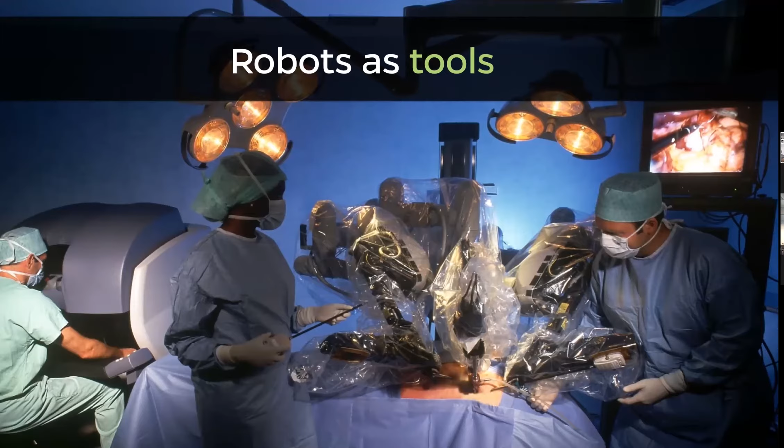On the other extreme of this spectrum is the autonomous robot, where robot is an autonomous tool. They operate and function autonomously without human intervention pretty much. A good example of this will be warehouses. Any big online shopping store, they operate this way nowadays.

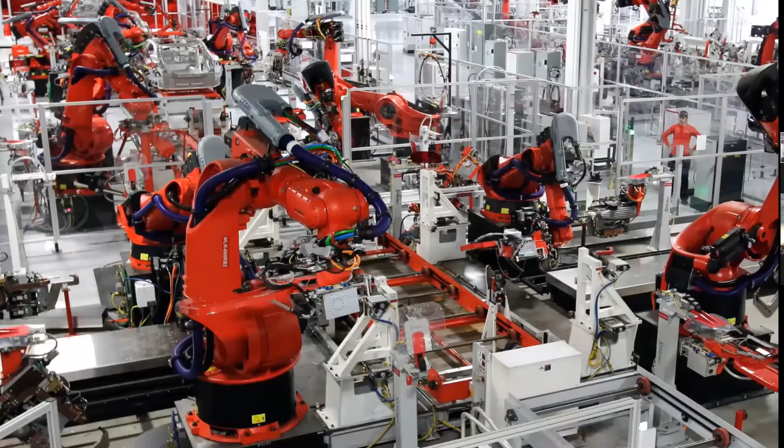Another example of this is manufacturing, like car manufacturing. I would say nowadays cars are manufactured pretty much 80 to 90% fully autonomous through the process. If you look at this, there is no interaction at all. There's only one person that sits outside of the cage, and that person doesn't do anything, just monitors to make sure things are going. So this is on the other extreme of robots as autonomous tools.

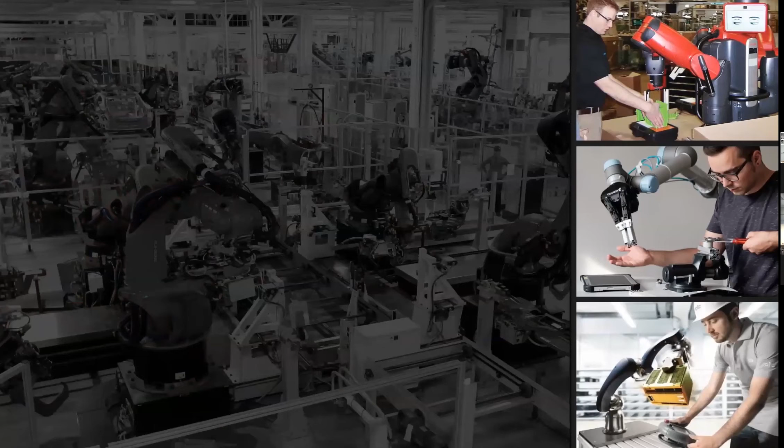But now we're transitioning to something in between, where we have human-robot collaborations, where people and robots are working closely as a team, as partners. We're seeing this in manufacturing, and there are a number of reasons behind this. One is that people's shopping style is different, and they want customized items. We just want to buy things more quickly nowadays. So there's a lot of customization, and short product cycles drive a lot of this.

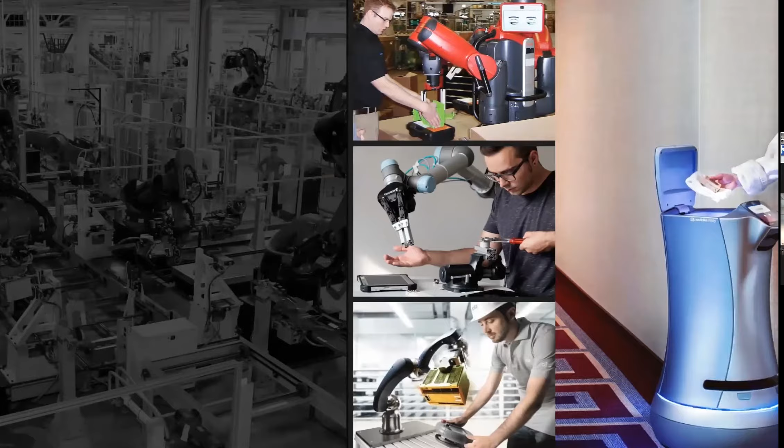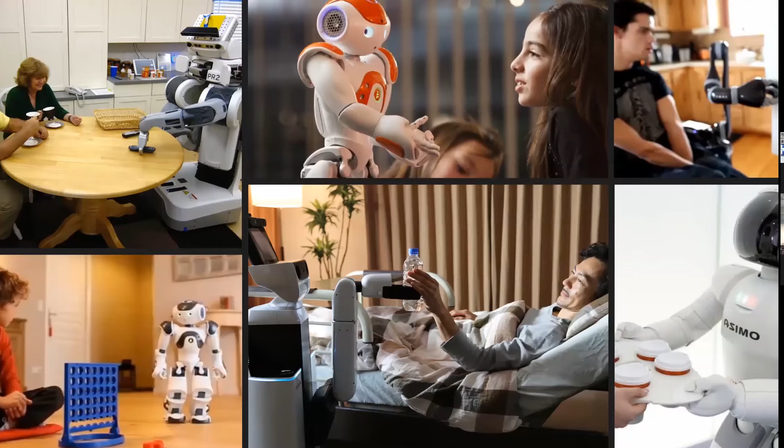Also, small and medium-sized manufacturing cannot afford fully autonomous floors of robots. We're seeing this kind of transition not only in manufacturing, but also in a lot of our daily environments. In hotels, big supermarkets, they are also piloting robots to do some of the non-human-facing kind of work. We're also seeing this in more close-to-us environments, like home, learning, hospital, where we see a lot more close interaction between humans and robots.

So there's a group of people, myself included, doing a lot of work in this space, trying to facilitate this fluid, effective interaction between humans and robots. And in this itself, I see a lot of opportunities where we can bring this kind of technology to benefit humans at large. So today I just want to talk about a few projects that highlight our learning in the past few years.

I structured this as a way of principles of effective human-robot interactions. We learned a few good principles that all designers and developers should pay attention to in the coming years as we continue to develop robotic systems for people.

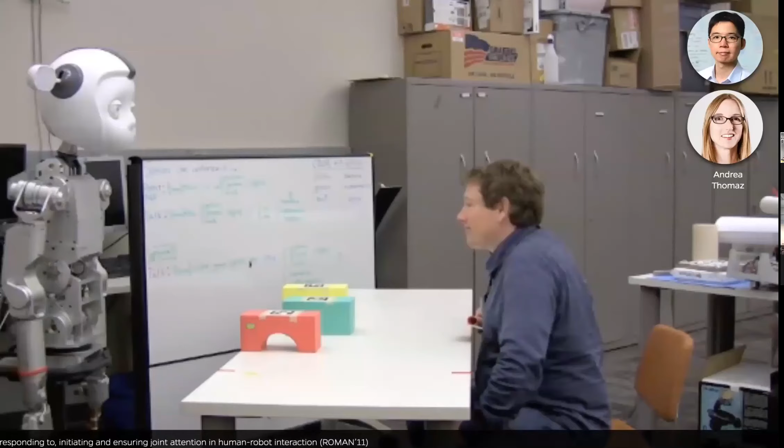So the first principle I want to talk about is multimodal social behaviors. I'll start with this video, which is about 10 years ago when I started at Georgia Tech. The interaction here is very simple - just to give you some context before I play it. The person is going to teach the robot some concepts: this is a yellow object, this is a green object, this is a red object. The yellow object is a banana, the green object is a watermelon, the red object is an apple, using gestures.

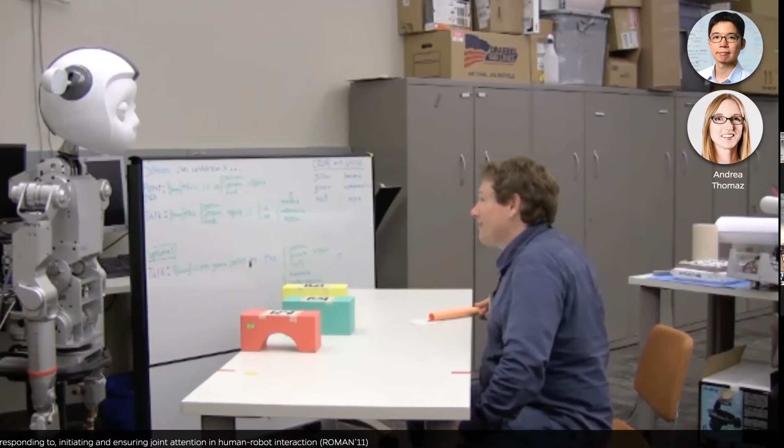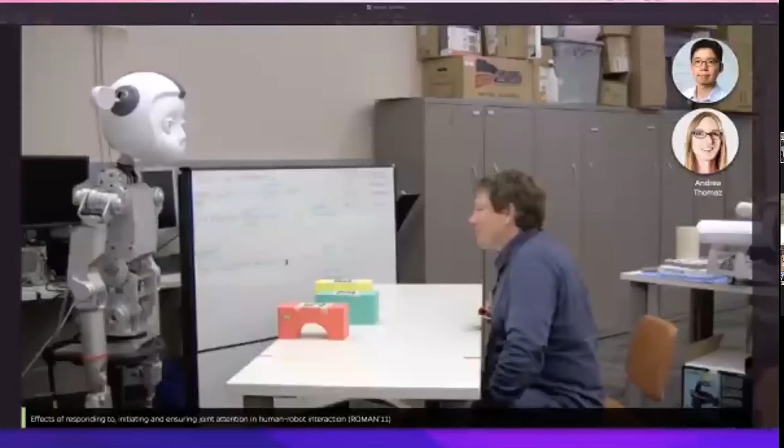Should there be audio? Okay, doesn't sound like we have audio. So let me share again - share audio when you share your screen. Well, let's see, I may need to stop sharing. Does that work? No, we don't hear anything.

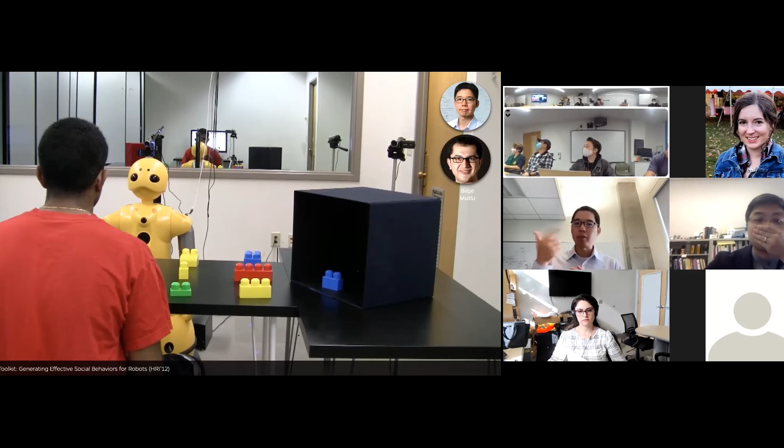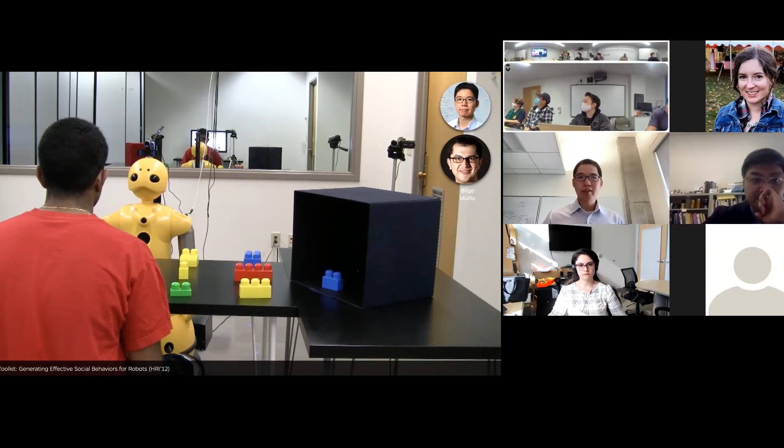So here's another example where we flip the role, right? So the robot is the instructor, the person is quote unquote the worker. The robot is going to give instruction to tell the person which object goes to which bin. Think about this as a sorting task. Let's take a look. Hopefully the audio will work.

Could you help me put the red object with 4 pegs in a row into the blue box, please?

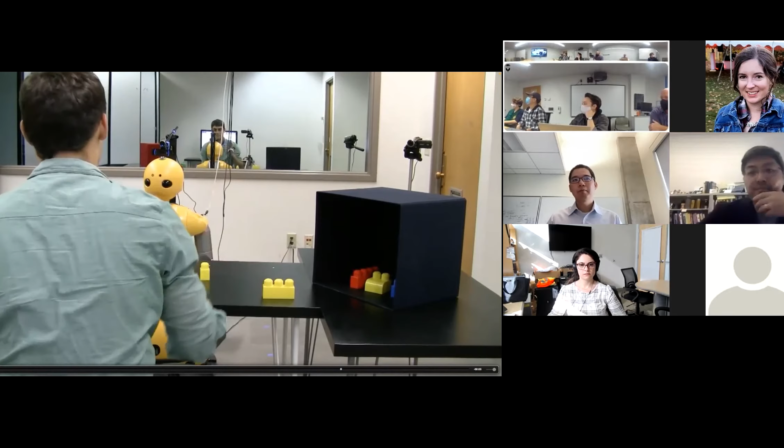So even very simple head orientation or gaze cues, if you will, are very effective. People actually pick it up, even if it's very subtle.

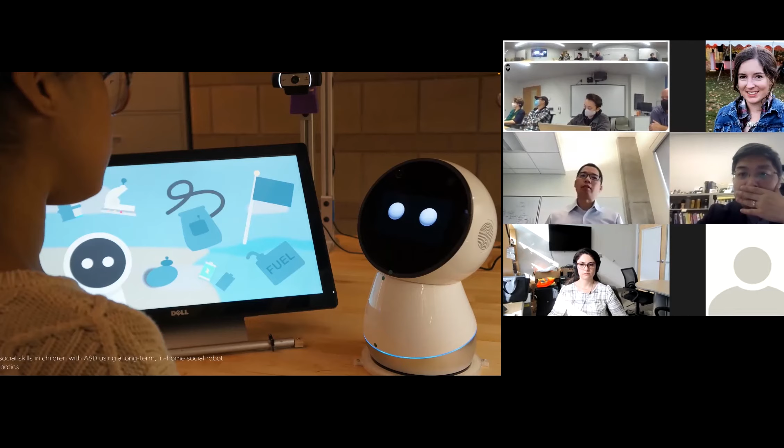So the next project I want to talk about is we know that behavioral cues, social cues are important during situated interaction, but there are some people who are not good at this kind of interaction, right? Especially children with autism. So we're thinking maybe we can use social robots as a way to provide or model good, quote unquote good behavior for these children. So there are reasons behind it. These children are more into computers, robots, because they are more predictable, right?

So before I talk about this project, let me just play this footage from CNN to motivate this a little bit more.

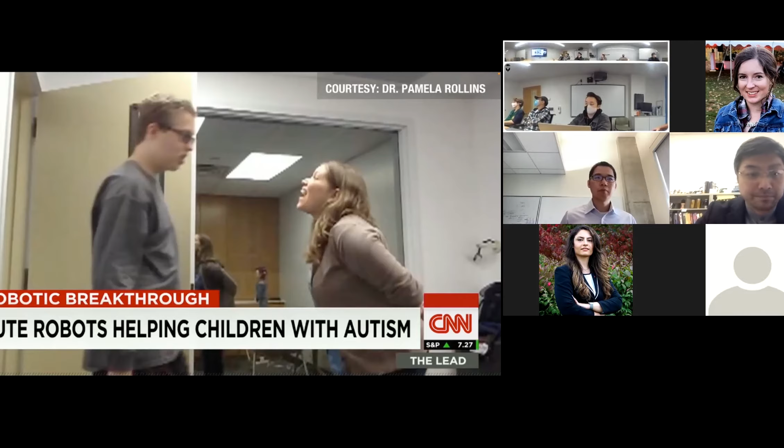Children with autism often have a hard time talking with or even looking at human therapists, like this boy. But look at how he lights up with Milo.

We found that, yeah, so over the years, we have seen evidence where children with autism, they are more responsive to robots. So we thought there's an opportunity for social robots to be a sort of like a model to provide trainings for these children.

So we started to build social behavior into the robot in the idea of doing behavioral intervention. So the first core social behavior we built into the robot is eye contact. As the person moves around, the robot is trying to maintain eye contact with you. So this is a core social skill we want them to pick up.

The second core social skill we want to deliver to the children with autism is shared attention. So as I look at something, the robot will look at something with you as if they are sharing attention. So these two are core social skills we want to model through the robot behavior.

And on top of that, we build essentially an intervention curriculum that facilitates their interaction. So I'm just going to play this demo video to show the interaction between the robot, the child, and caregiver.

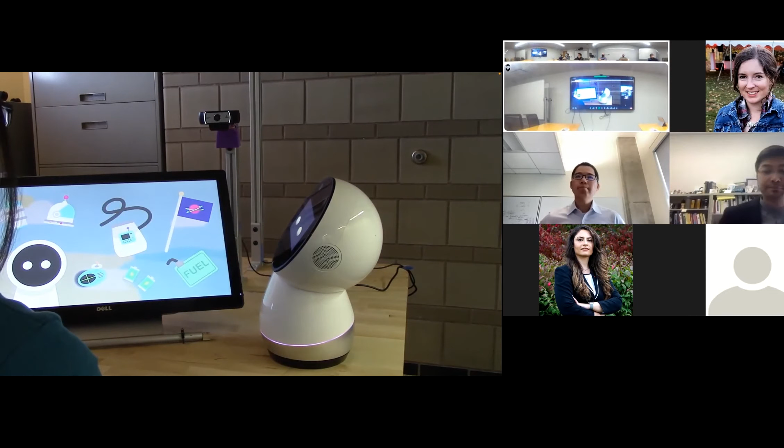Yay! Hi, Eliza. It was really hard leaving my family a few days ago when I had to board my spaceship. Goodbyes can be really sad. I held on tight to prepare for landing. Then, I heard my spaceship splash into the water, and I opened my eyes. Looking around, I could see that I was safe and okay. And I could see that I had safely landed on the beautiful planet Earth. Each day I will have some games to play. If we work together and finish all the day's activities, I will earn back a piece of my gear. Thank you so much for helping me fix my space gear. I'm really excited to play. Which game would you like to play first today? Nice choice. Let me get the game ready.

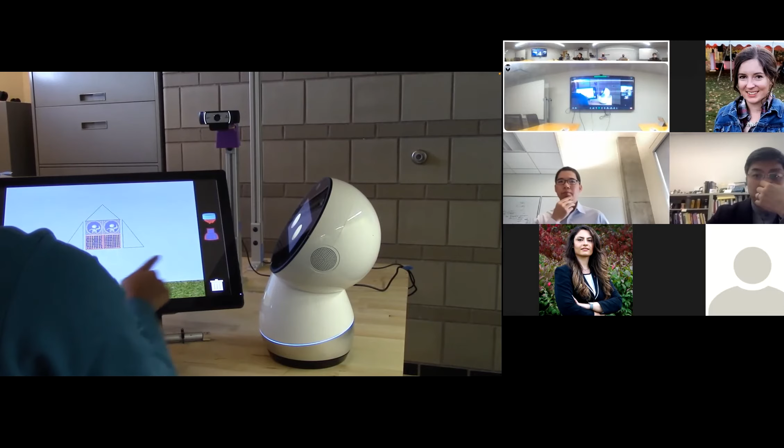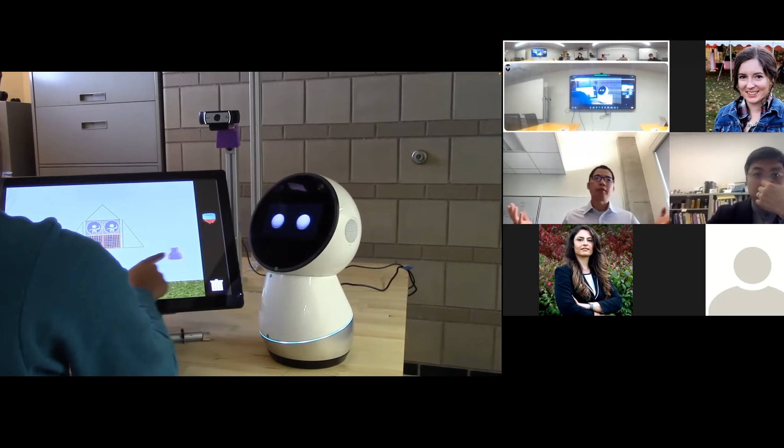So essentially, we build this whole intervention curriculum for the family, and we deploy this system into people's homes for 30 days. The idea is that during the 30 days, each day they will do a 30-minute session with the robot. Through gameplay, the robot will model good, quote unquote, good social behaviors. We do this fully autonomously. We track where they are looking at, and we provide personalized content that we're presenting to the children.

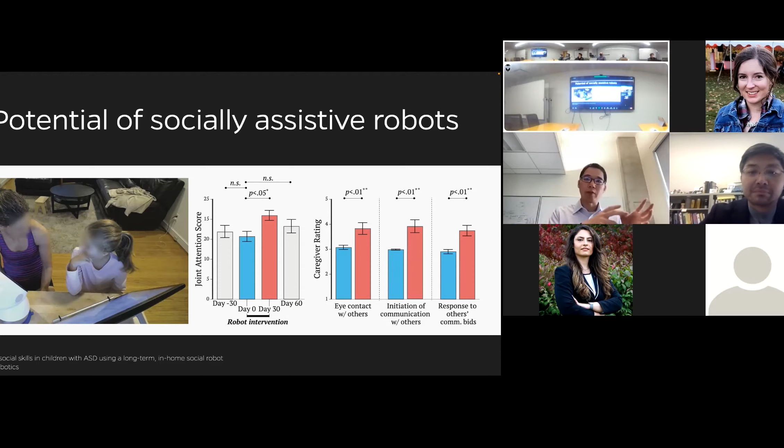One of the things we learned is the 30-day deployment was effective. Their performance, especially joint attention skills, improved. But then that skill did not sustain. After another 30 days, their performance dropped a little bit. So this opens up a lot of questions that we are currently exploring right now: how long should we actually deploy the system in order to see sustained benefit? But this field project shows you the importance of social behaviors, social cues, and how we can use this kind of technology to deliver social behavioral skills for children with autism.

So that's the first principle that we learned in the past few years, the importance of social skills and behaviors. The next principle that we learn is adaptation. When we think about human-robot working together, they really need to adapt to each other, because each person's style is different. So I want to use this project to give you a sense of what I mean by adaptation.

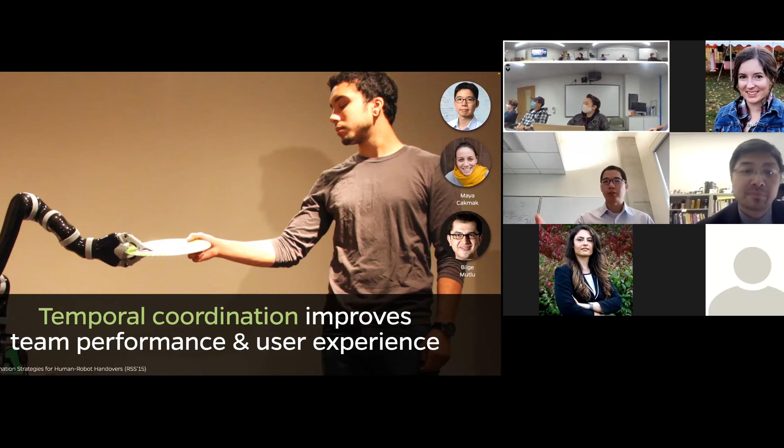So we use handoff as an example to study this. If you think about human-human handoff: when the other person is not ready, I'm not going to reach out my hand and just wait for the other person to get ready. I see when the person's ready, and I'll reach out. So as humans, we're actually really good at adapting and coordinating our actions with one another. So how can we build this into robotic systems?

So we've essentially got a lot of inspiration and understanding from human-human interaction. We have people come into the lab to do this kind of handoff. We build a model around it, and test it on the robotic system.

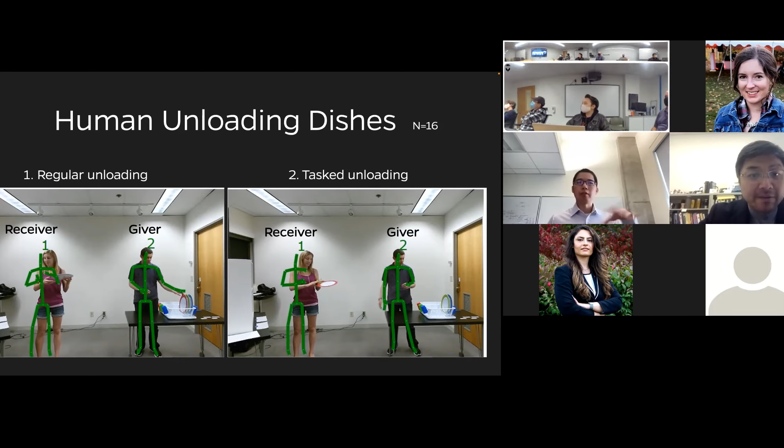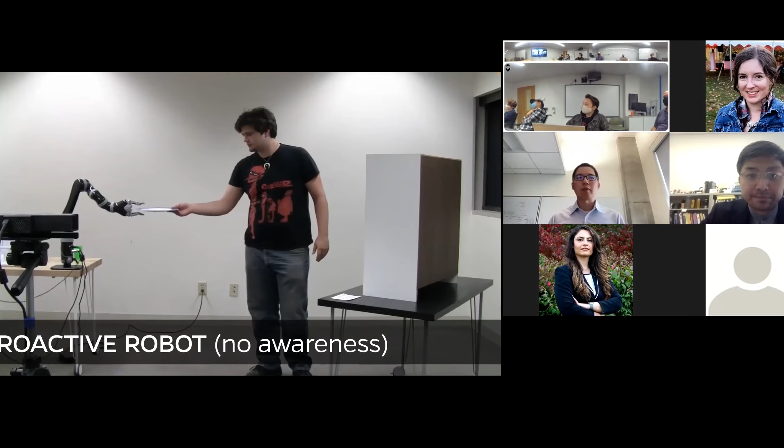Without going into detail, I'll show you our implementation on robots. The very first one is what we call the proactive robot, where the robot doesn't have any awareness of the person's workload. It's a very similar task: the robot is the giver, the person is the receiver. So after passing the plate, we give a secondary task for the person to solve a math problem. It's very difficult, you have to solve it on the spot. In this case, the robot did not have any awareness, so it just doesn't care what the person is doing.

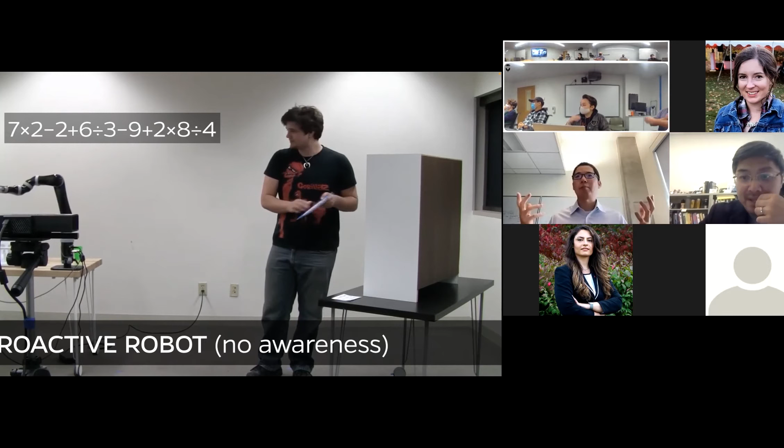And you see here, the person was pressured by the robot. The person was going to put the plate at the corner, which means 'I don't know how to solve the problem, I give up.' So the person was pressured by the robot and gave up on the secondary task. Obviously this is not ideal. We don't want this kind of human-robot collaboration.

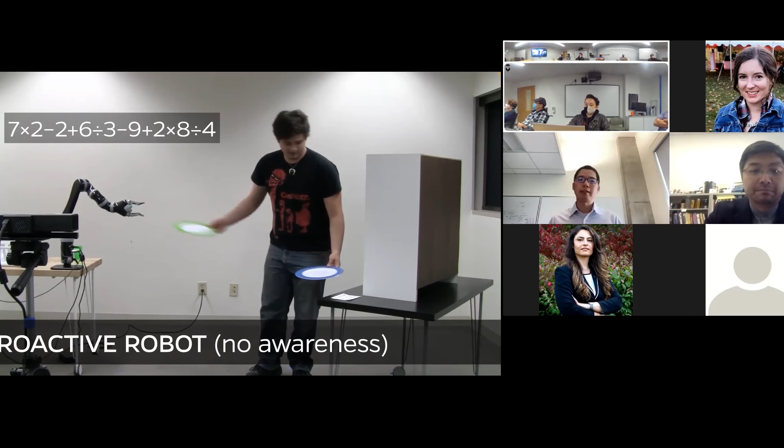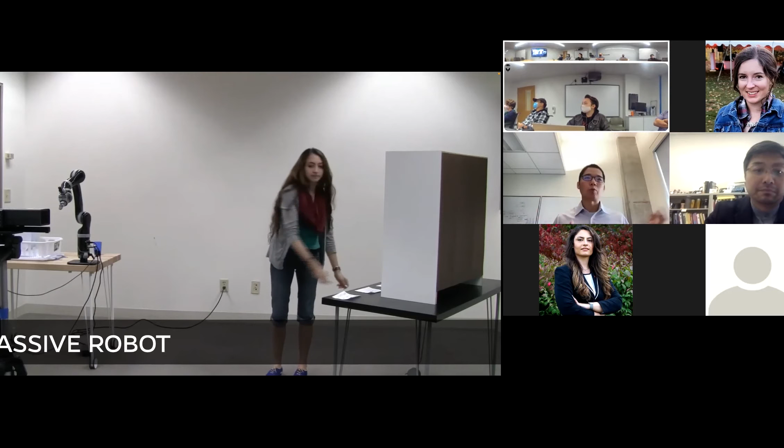So another thing we can do is make the robot passive. If you're working on the problem, I'll just wait; as you finish up, I will work on my part. This is very much like turn-taking. It works very well, the only downside is it's not that efficient. If you think about the human-human handoff video I showed you earlier, people are not doing this kind of waiting. People do a very fluid collaboration.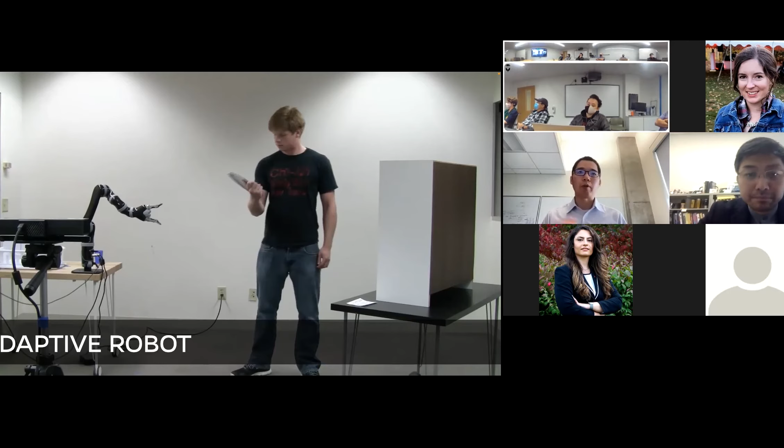As the person finished up the task, the robot presented the next one. The person was very confident about this handoff—he wasn't even looking at it at the moment. This is the kind of adaptation and coordination we would like robots to have when they come into close proximity to do collaborative work with us.

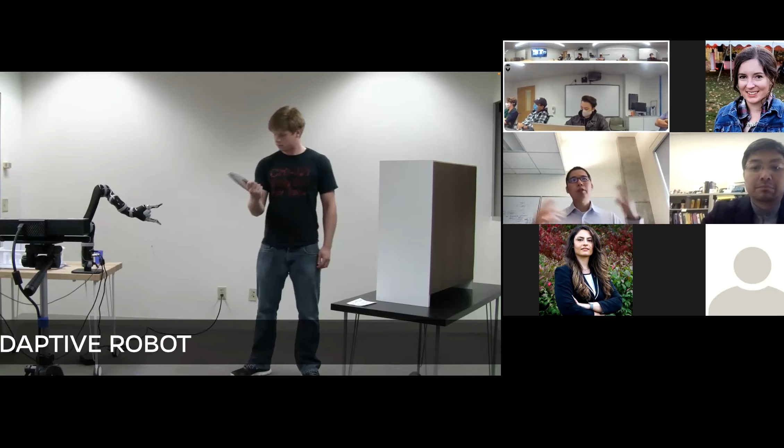We also explore this kind of adaptation in a learning domain. The idea is to have a personalized education setup for children. The setting is child-robot interaction: the child is learning, doing math homework, and the robot is sitting next to the tablet which presents the math problems. The robot keeps track of the child's performance and provides personalized break points.

The idea is that everyone's attention span is different. So instead of having a fixed block, like taking a break every 35 minutes, the system senses when you need a break and gives you one.

I'll play this video, and you'll see the child kept getting things wrong and got frustrated. The robot sensed this through the performance data from the tablet and provided a break for the kid.

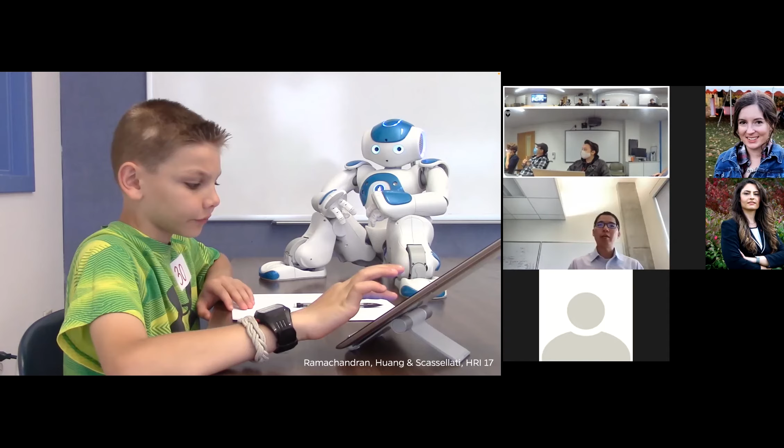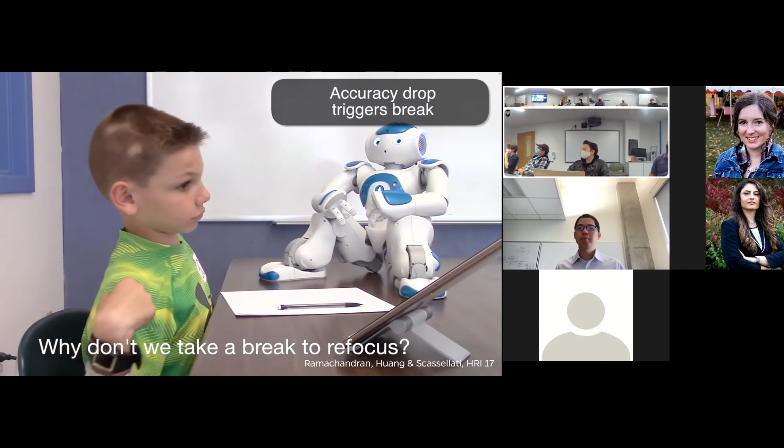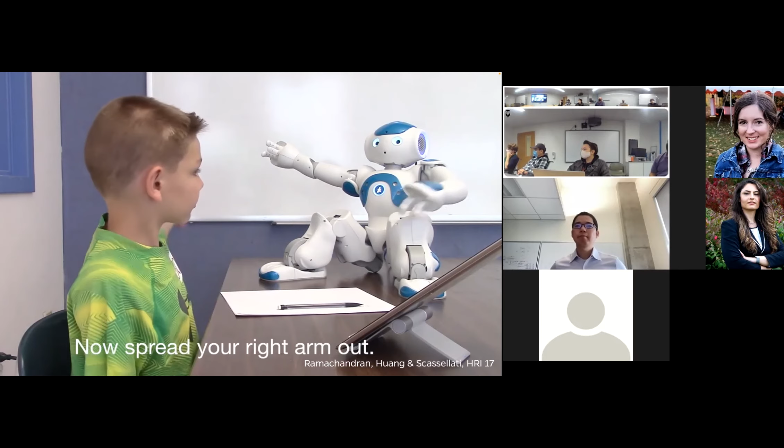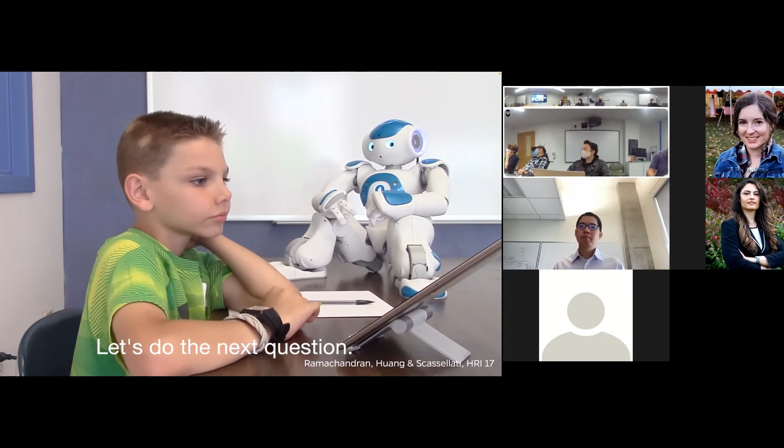How about another problem? The correct answer is 118. Let's try the next problem. The correct answer is 62. Why don't we take a break to refocus? Then we can keep going with the problems. Let's stretch, follow my lead. First spread your left arm out. Now spread your right arm out. Hold this position for a few seconds. Raise both arms up. Count to 10 with me while we keep our arms up. 1, 2, 3. Great job following along. I hope that was relaxing. Let's get back to our math problems now. Let's do the next question. That is correct.

We compare this personalized approach to the traditional approach where breaks are taken at a fixed interval, and we show there's a benefit of the personalized strategy for children working on math problems.

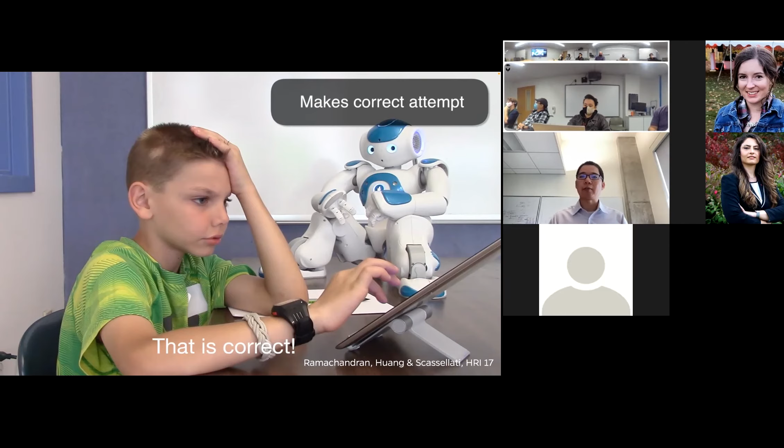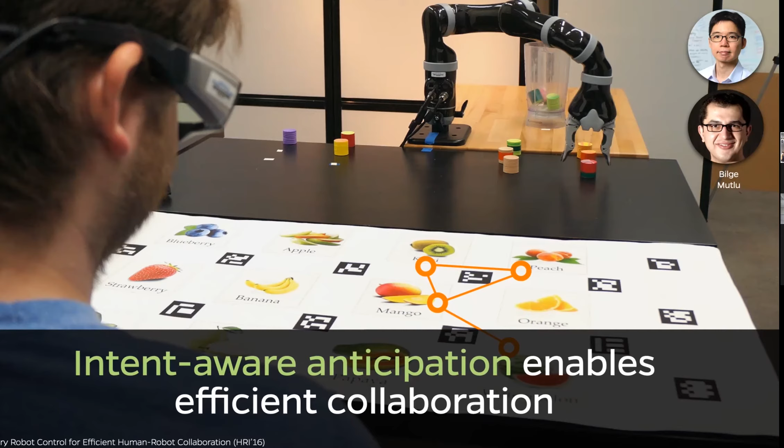The next principle I want to talk about is anticipation. For a fluid human-robot team, it's not just about adaptation, but also anticipating what the other person might do in order to prepare for that adaptation. The way we think about anticipation is to recognize intent, especially by looking at eye gaze—where people look, particularly in situated tasks, tells us a lot about what they might want to do next.

We studied this in a mock setting where we simulated a sandwich building task, similar to going to Subway and telling the food server what ingredients you want for your sandwich. On the table we have different ingredients, and the customer tells the server which ingredient he or she wants.

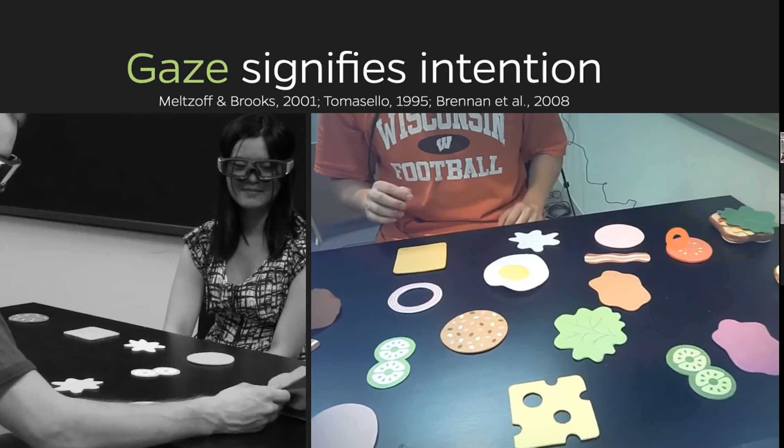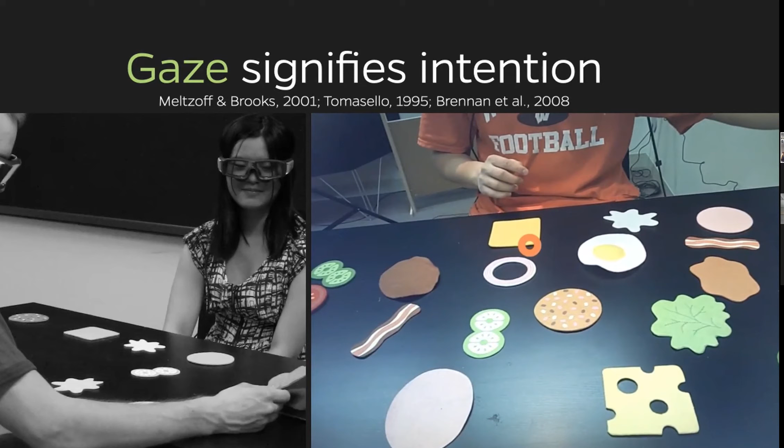The person shops around, looking at different ingredients, and we track where they're looking as they do the task. So we have a bunch of data like this—a sequence of gaze fixations—and the question is: can we predict which ingredient the person is going to order? We essentially translate this into a multi-class classification problem.

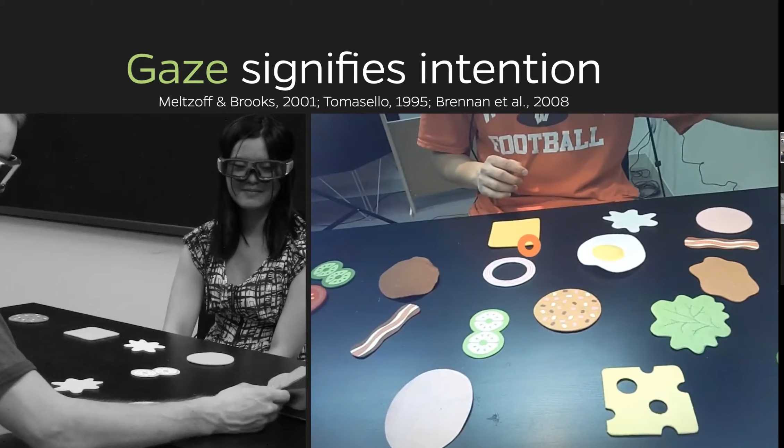Now I want to show you a demo. The person is the customer, the robot is the server. On the table again we have a simulated setup with different ingredients. The person is going to order lettuce in this case. On the right we're showing the likelihood of which item the person is going to order, which in this case is number 8—not the best presentation, but it's number 8. Let's watch this.

As the person shops around, the robot becomes very confident about which item the person is going to order.

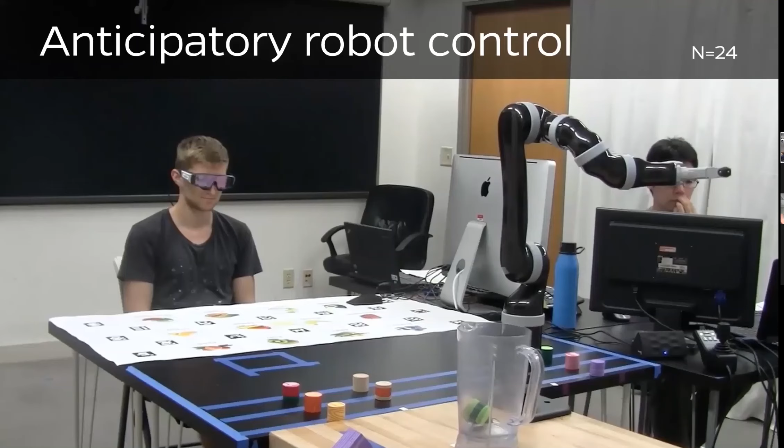With this, we did another human-robot interaction study, bringing people into the lab. Similar setup, different ingredients in front of them, and the robot as server. Participants wear a gaze tracker, and based on where they're looking, we do real-time predictions and operation. I was sitting behind four different monitor screens just to get this working, but it's a fully autonomous system. Let's take a look at what it looks like.

Next one—I would like banana. You ordered banana? Here I want to show that before the person actually says something, the robot is already moving toward that direction—right before 'banana' it's already moving that way, because we have a pretty good sense of what item they might order.

Next one, I would like mango. Before saying mango, the robot is already moving toward that direction. This is the kind of anticipation we would like to explore—whether or not people like it is a different story. So we compare anticipation versus purely reactive approaches, and show in terms of efficiency the benefit of this anticipation approach. But participants also comment that it could be creepy because eye gaze is very subtle information. For robots to quote unquote know this kind of information, it's tricky, right? So I think there's interesting discussion between team efficiency and user experience.

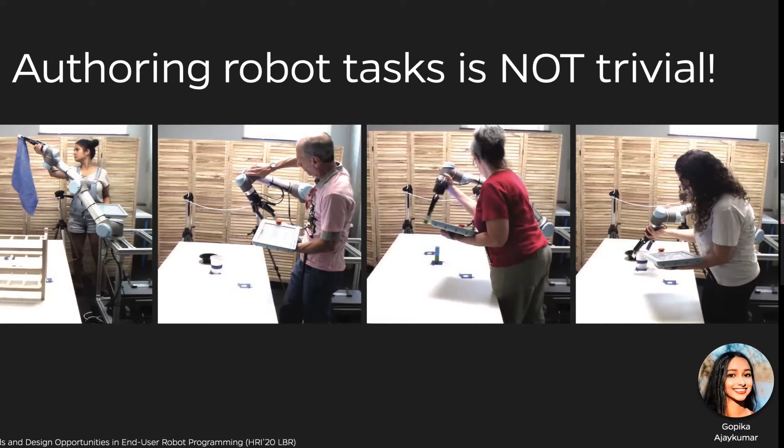So we have been exploring different interfaces and systems that can support end user programming. The first one I want to show you is what we call programming by situated illustration. So instead of sitting down to program or dragging the robot, I will just illustrate that on an interface. We have this projection-based interface that we project onto any daily surface—so this is a regular table, we project the interface so that any surface can become a programming environment.

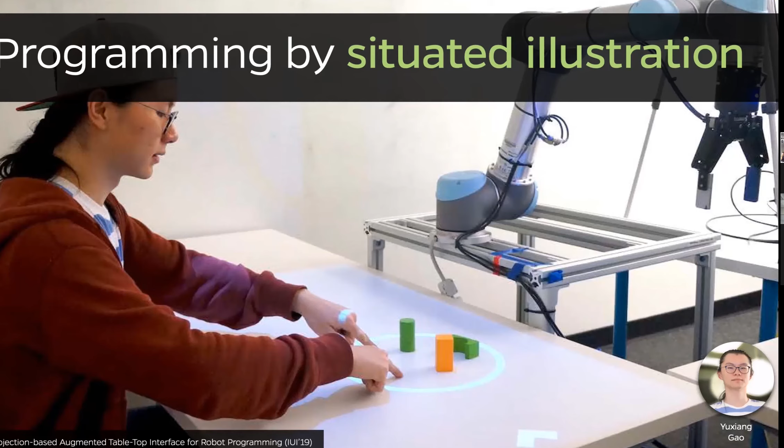To program the robot, you can use very simple touch-based gestures that we all know—swipe, zoom in, zoom out. We provide different tools: we can circle a group of objects I want you to move, then indicate the location I want them moved to, and put an arrow in between, so the robot does the pick and place task. Through these three simple gestures, users can instruct the robot to do the pick and place task.

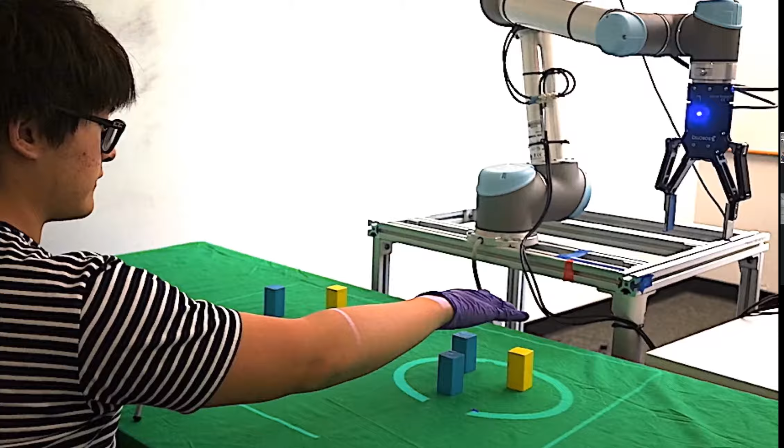We also explore this more in a situated setting, where instead of touch-based input, we use a situated gesture—I just point and then use natural language to tell the robot what objects I'm referring to and where they should go. Here's a demonstration of that.

Move this object over here.

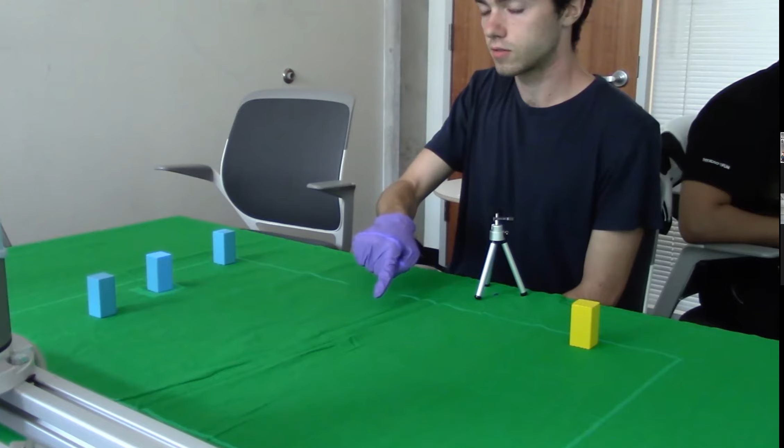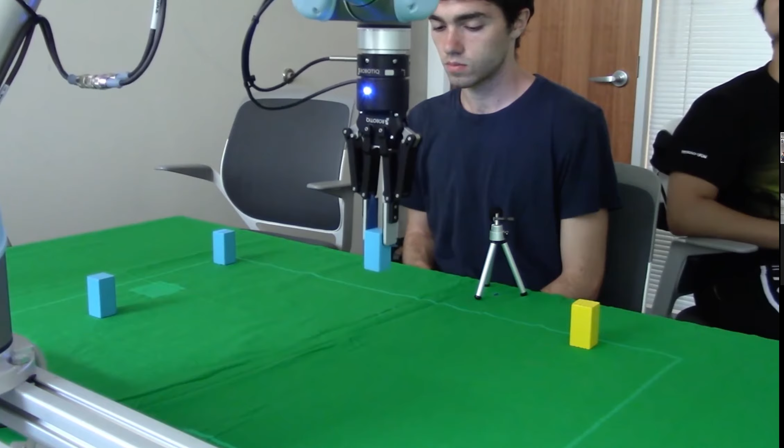We have this projection base to provide feedback, but essentially we're sensing where they are pointing. Obviously we have a lot of assumptions here that make this very simple in terms of perception, just because we are mainly interested in the interaction elements.

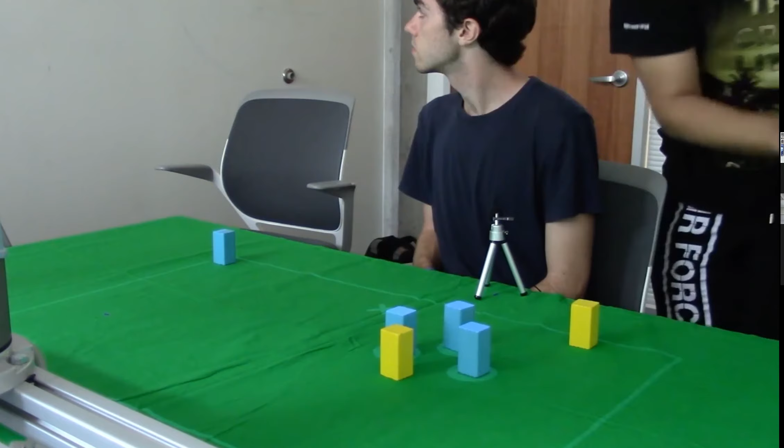So this kind of situated instruction or illustration is much easier for people to do. Here we're setting up a different task: move the blue objects...

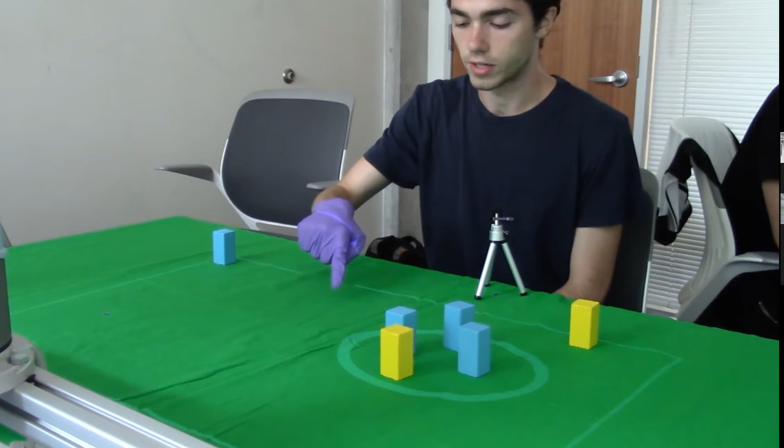Over here. So it's a combination of multimodal instruction.

We also look at different tools that we can provide to support this. As I mentioned earlier, most people, when they provide this kind of demonstration, find it very difficult, and as a result the demonstrations are not optimal—there are a lot of jerky motions, and the path might not be the shortest path.

So we essentially developed this Demoshop interface to allow people to do post-processing of their demonstration. The idea is that it's much like Photoshop—you take a photo, but there might be something not ideal during the photo-taking process, so you do post-processing later. We have this Demoshop that allows people to easily edit their demonstration, to cut off jerky motion elements, for example.

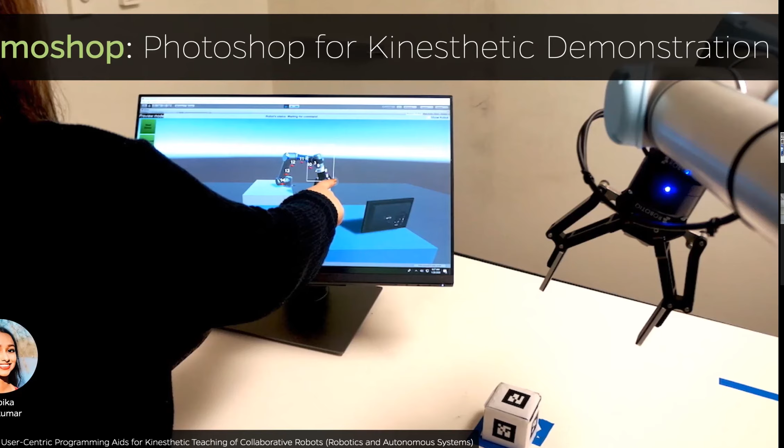Here's another approach we explore to help people provide demonstration. We call it first-person demonstration. Essentially, use their first-person view to capture the most natural way of providing demonstration.

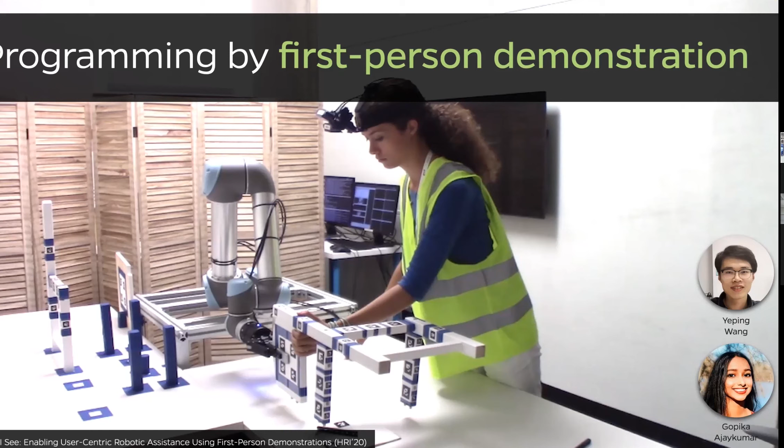We look at this IKEA children's chair, a very simple assembly task. Instead of sitting down to program the robot how to do this, we have a person do the task, and we record their performance through a head-mounted camera, then translate that to the robotic system. We want this first-person view because we believe it's the most natural way to handle the objects from the person's point of view.

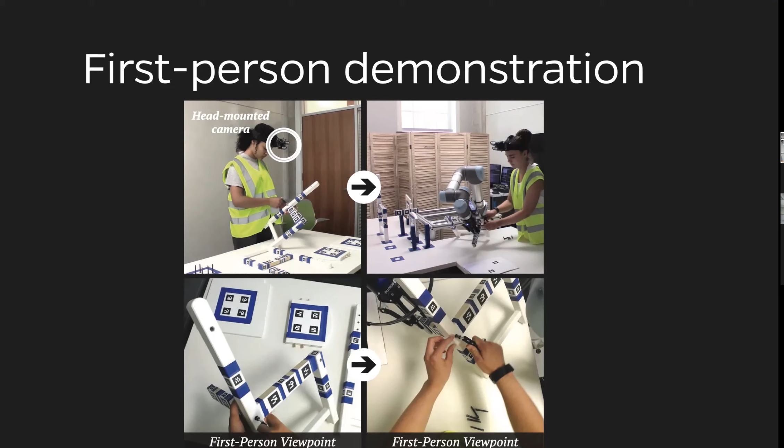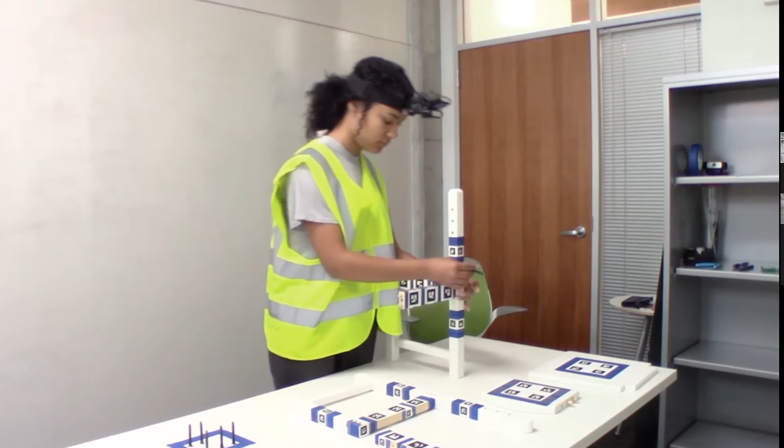I'll show you some video later so you can see why this is better than different viewpoints. But to give you some ideas, I want to show you the kind of task it looks like. Participants come to the lab to do this assembly task, and we record their first-person view.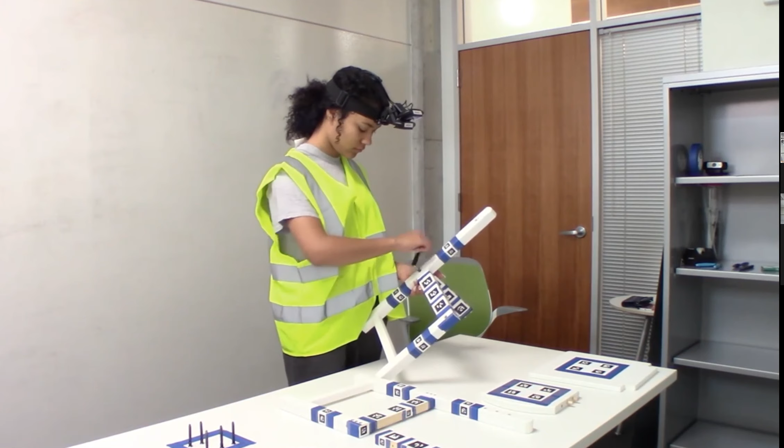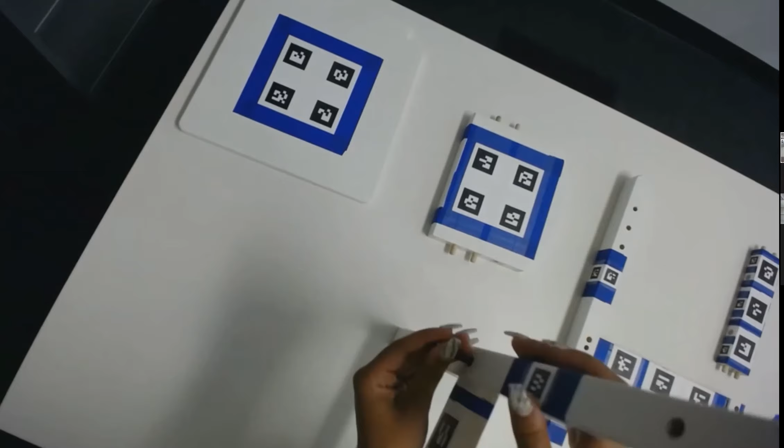So this is the third-person view, but from their first-person point of view, this is the kind of data we collect — picking up the tool, picking up different pieces. Again, we're simplifying a lot of the perception problem here; we use different kinds of AR tags to sense the objects and configurations.

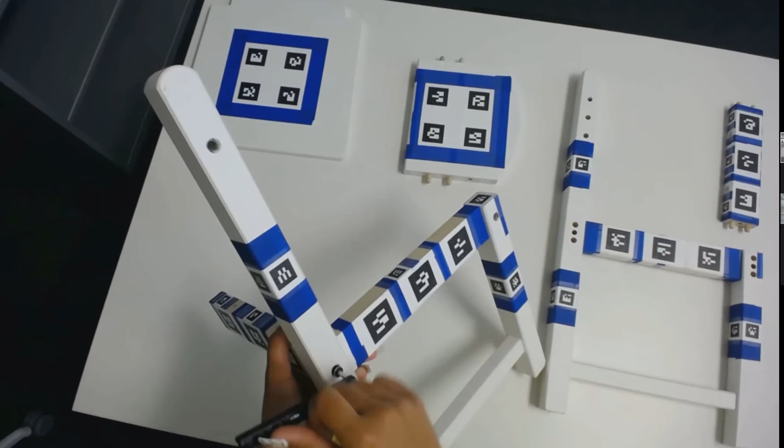Here's an example where this viewpoint is ideal for the user because of the previous demonstration, so it's much easier for the person to do the task with the robot. The robot will pick up the next piece and present it to the user for assembly.

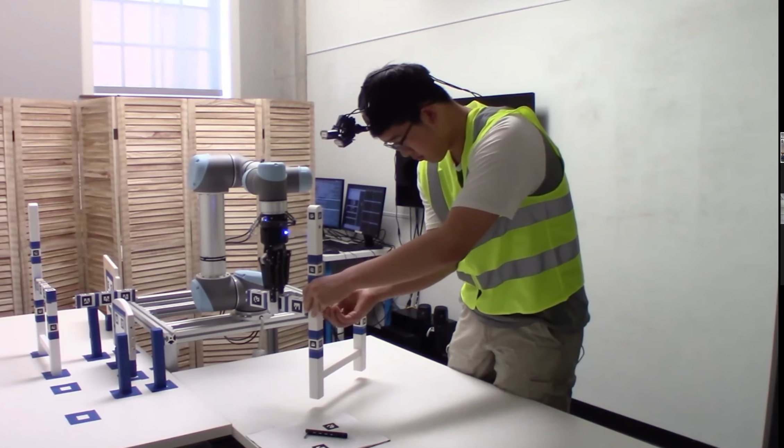We compare this to a baseline, which essentially uses IKEA's front page as a configuration guide. You'll see from the video that it's very awkward for the person to work with this particular viewpoint. So in this project, we explore first-person demonstration that can capture a more natural way of assembly for the participants.

The last principle I want to talk about today is error awareness. We can do end-user programming, we can do all the AI-driven approaches for robotic assistants, but at the end of the day they are going to make mistakes — they won't be perfect all the time. So how can the robot system become aware of its mistakes?

We look at this from the idea that people respond socially to something unexpected. We did a data collection study to explore how people respond to robot errors. They would program the robot, but instead of playing their program, we would play an erroneous program where the robot makes a mistake, and we wanted to see how they respond.

What we learn is people respond socially to any kind of robot error — they might show a surprised facial expression, smile, laugh, or look very suspicious of what's going on in the robotic system. We actually see this kind of behavior escalate over time: they might start with something mild, like raising an eyebrow, then a scrunch, then look away in disbelief, then smile, then maybe provide verbal comments.

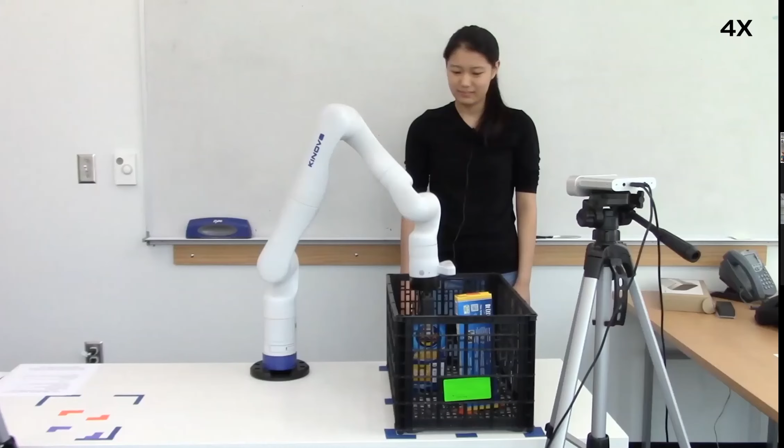We see various social responses, this kind of escalation. The idea behind what we're doing is that if the robot can sense these social responses, it's a good indication that it might actually be making a mistake. So we're now doing a larger data collection where, similarly, the person provides a demonstration and everything looks good, but when the robot plays it back, it intentionally makes a mistake, and we capture a lot of multimodal information from the user. This is what our data collection looks like.

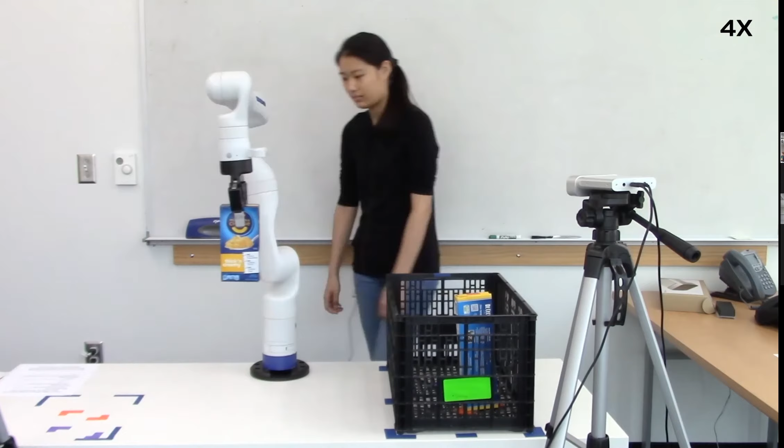As the unexpected thing happened, the person was surprised and shocked, so we collect a lot of data. Right now we are doing the modeling part, to ideally create something that can anticipate an error might happen based on the initial social responses, so that the robot can either stop before the error happens or initiate mitigation strategies early on.

This is still very early work, but we see a lot of potential in leveraging people's natural social responses as a way to increase the robot's awareness of its performance and capability.

I went through many different projects very quickly today, highlighting different principles we've learned over the past few years about building effective human-robot interaction or human-robot teams. I think there's a lot more to do in this space — for example, how do we quantify or model 'social norms,' so to speak, into robotic systems?

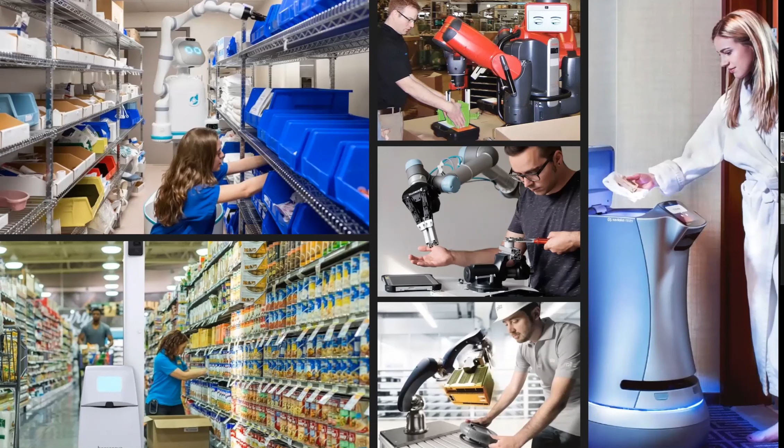What are the longer-term benefits and impacts of this kind of robotic system on human behavior, or just the way people do their work? We're seeing a lot of potential for this technology, and it's at least in the process of transforming how people do work at hospitals, in public places, even in manufacturing. I want to stop here so we can have some discussion and questions. Thank you for your time, and I'll be happy to discuss more.